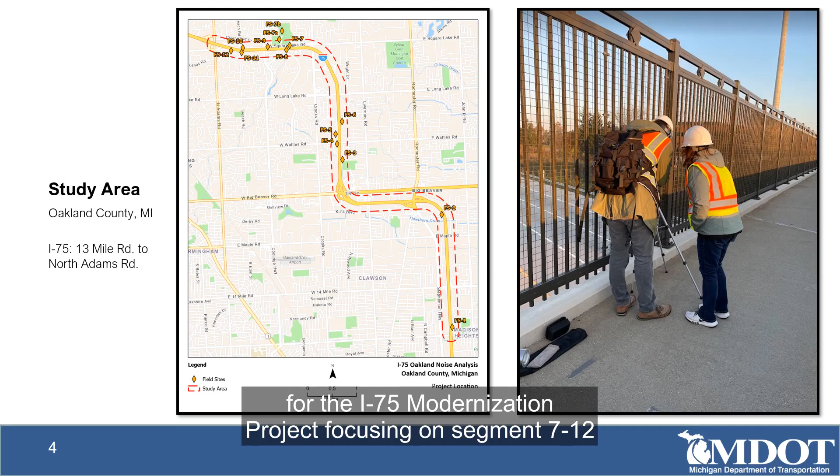This evaluation has been completed in response to a citizen-led request to investigate noise levels and the potential for additional noise barriers that might benefit noise-impacted residents and property owners in the I-75 study area. It follows several previous studies for the I-75 modernization project focusing on segments 7 through 12 from the original 14 study area segments, which is roughly a 10-mile section from approximately 13-mile road to North Adams Road, as shown on the figure, which also shows the noise measurement sites that were gathered on November 2nd and 3rd of last year.

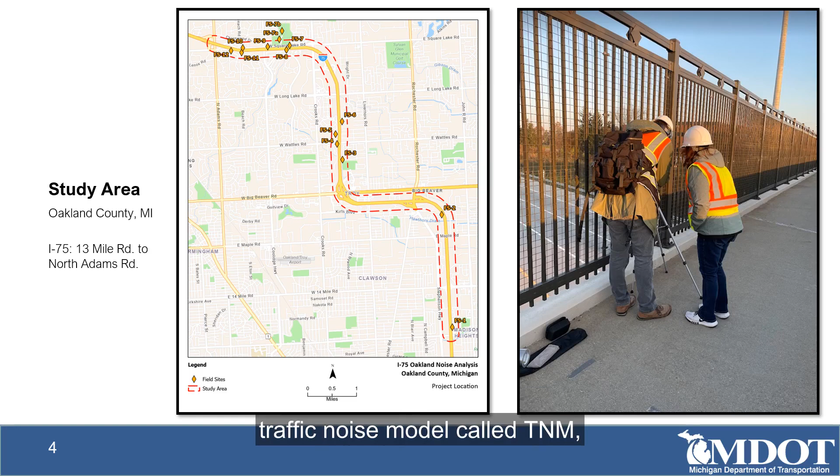The measurements are not used to determine whether there are impacts or whether noise abatement is needed, but rather to validate use of the federally required traffic noise model called TNM through comparison of measured and modeled noise levels.

Noise measurements were taken at 14 site locations, and these measurements were conducted with a Type 1 sound level meter for a period of 15 minutes each, with traffic recorded concurrently with video.

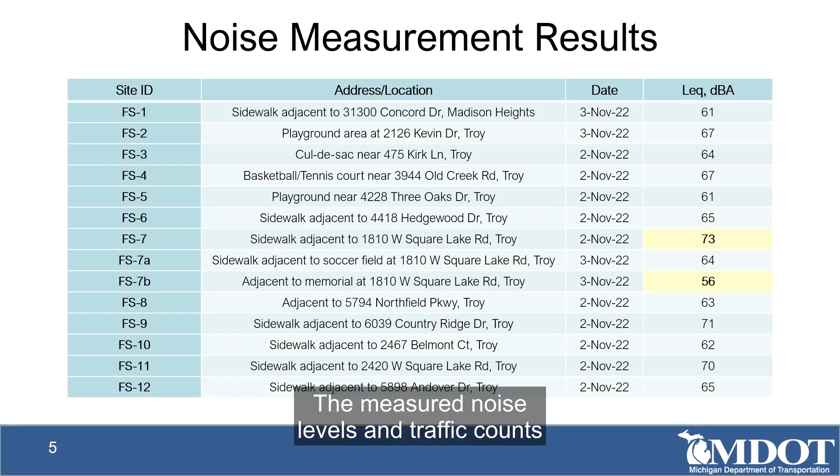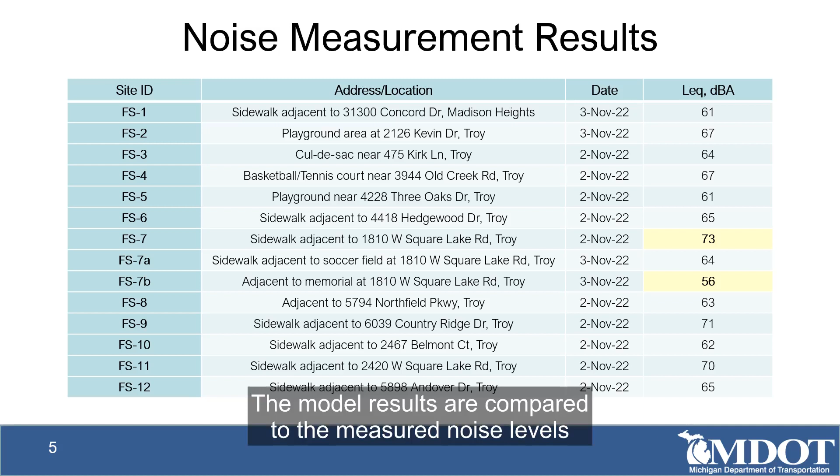The measured noise levels and traffic counts were input into TNM to validate the noise model. The model results are compared to the measured noise levels to determine if they are within plus or minus 3 decibels of each other, which satisfies the MDOT requirement for validating the noise model with measurements.

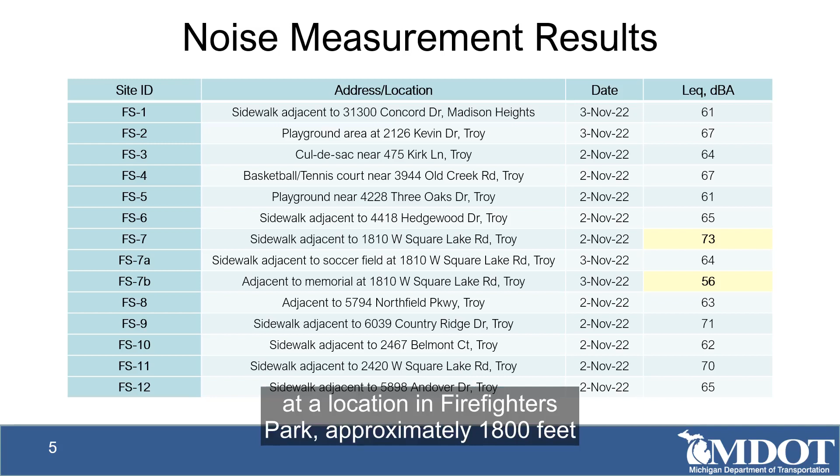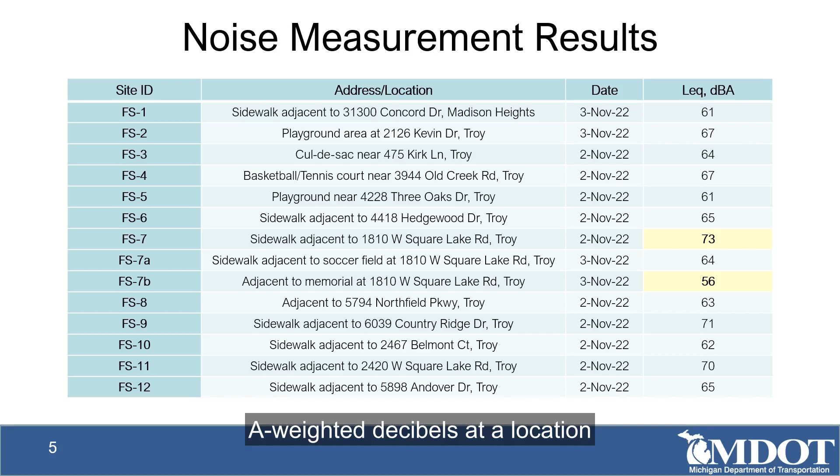To summarize the results, noise levels ranged from 56 A-weighted decibels at a location in Firefighters Park, approximately 1,800 feet from I-75, to 73 A-weighted decibels at a location north of Square Lake Road, approximately 200 feet from I-75.

Next, we will cover the noise model process.

FHWA's procedures for abatement of highway traffic noise and construction noise as presented in the Code of Federal Regulations, Title 23, Part 772, as well as the MDOT Highway Noise Analysis and Abatement Handbook, govern the noise analysis procedures.

Existing sound levels in the project area are modeled using the latest FHWA approved traffic noise model, which is TNM 2.5. Future sound levels are then also determined through use of TNM, using a future projected loudest hour traffic year in the model. The model contains specific inputs such as roadway configuration and elevations, shielding elements such as bridges or buildings, topography, and ground type in order to create a representation of the study area environment.

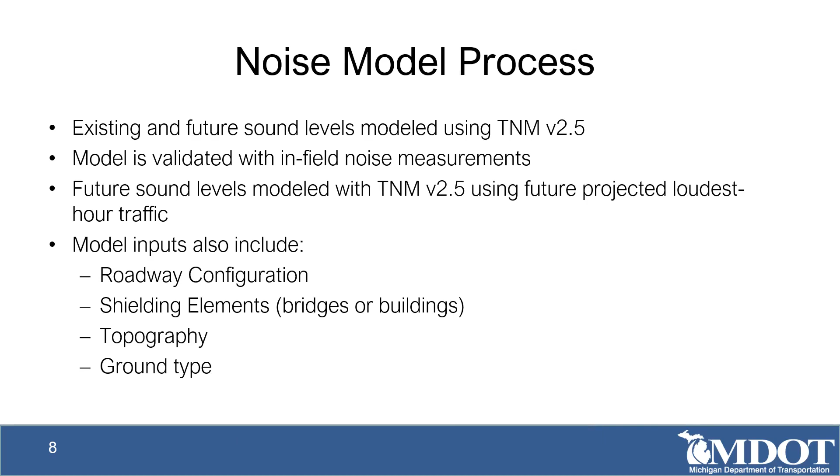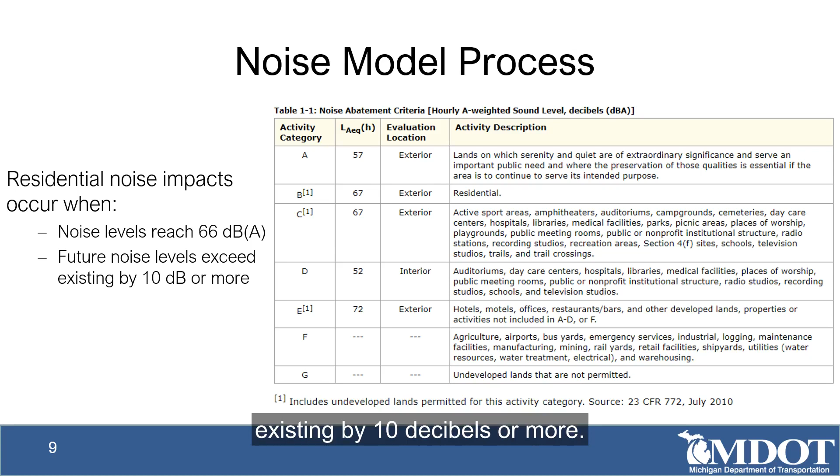Noise impact occurs for residential and outdoor recreational land use when predicted sound levels approach, which means within 1 decibel, or exceed the noise abatement criteria of 67 A-weighted decibels, or if future sound levels exceed existing by 10 decibels or more. The noise abatement criteria for other noise-sensitive land uses are also given in this table from the federal regulation.

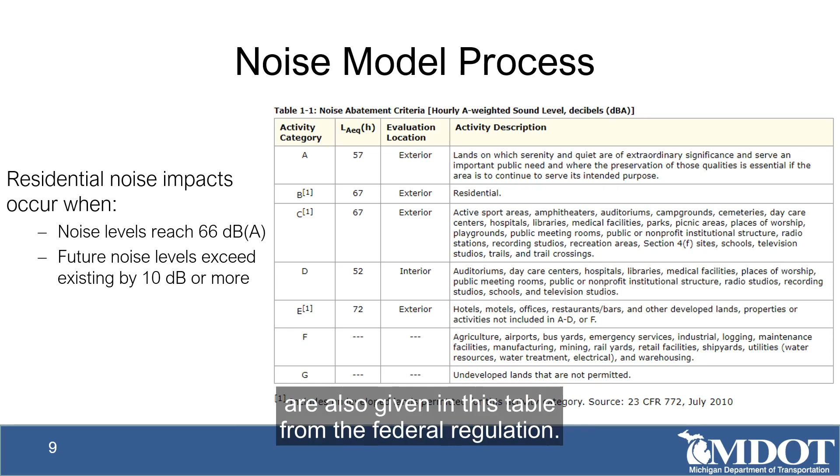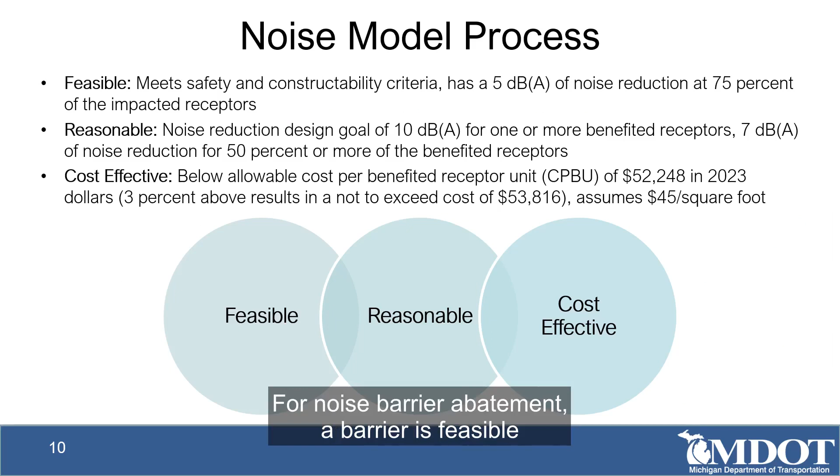After impacts are identified, we analyze noise abatement. For noise barrier abatement, a barrier is feasible if it has no construction impediments, meets safety requirements for the traveling public, and acoustically can provide at least 5 A-weighted decibels of noise reduction at 75% of the impacted receptors.

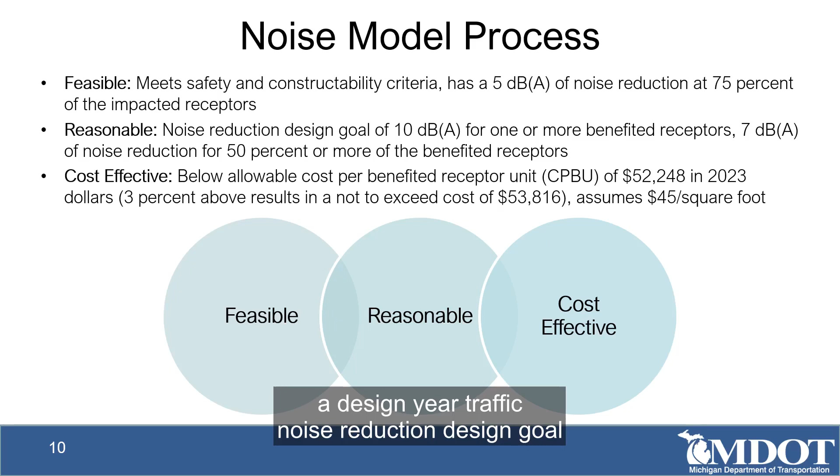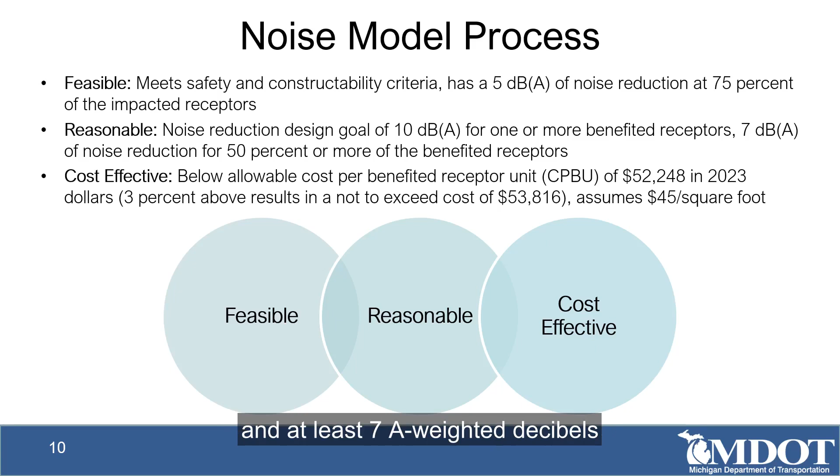A barrier is reasonable if it provides a design year traffic noise reduction design goal of at least 10 A-weighted decibels for one or more benefited receptors and at least 7 A-weighted decibels for 50% or more of the benefited receptors. Benefited receptors are those that get 5 decibels or more of noise reduction.

As part of reasonableness, a barrier must be cost effective. To be cost effective, a noise barrier's estimated preliminary construction cost must be no more than 3% above the allowable cost per benefited receptor unit of $52,248 in 2023 dollars. And this is assuming a planning cost of $45 per square foot of noise barrier.

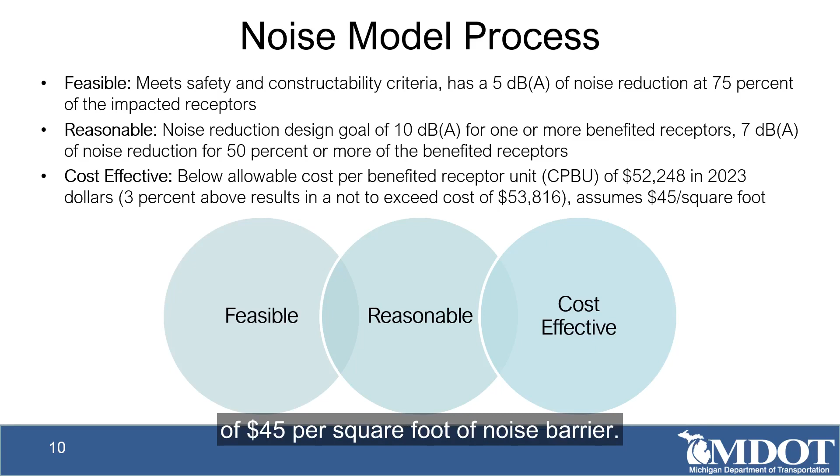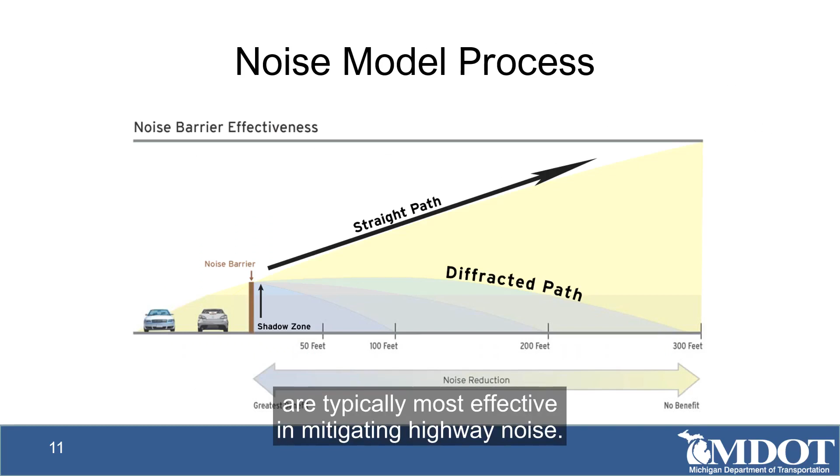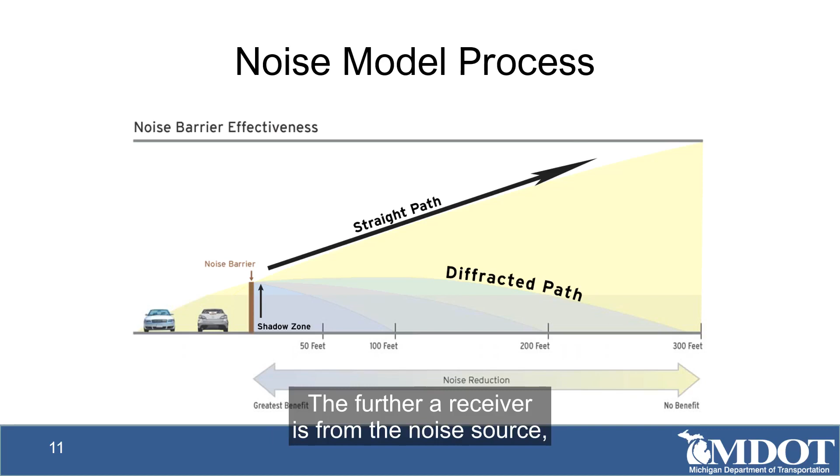This graphic illustrates where noise barriers are typically most effective in mitigating highway noise. Sound intensity is inversely related to distance. The further a receiver is from the noise source, the less intense it sounds. Noise barriers do not eliminate roadway noise. Rather, they block the direct path of the sound and reduce the intensity.

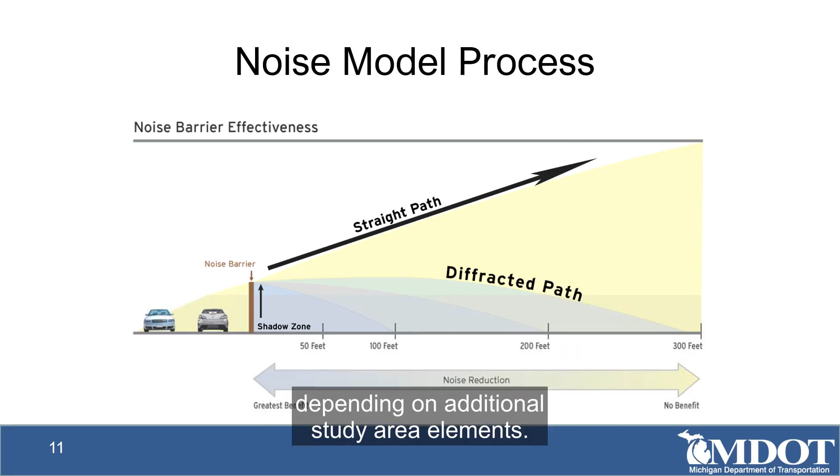Effectiveness depends on the distance between the impacted receptor and the barrier. Benefit decreases as a listener moves farther away from the barrier and is negligible at distances greater than 300 to 500 feet, depending on additional study area elements. This is due to diffraction of noise over the top of the barrier, in conjunction with the fact that noise levels are already lower with increased distance, so noise barriers are most effective in the shadow zone identified in this graphic.

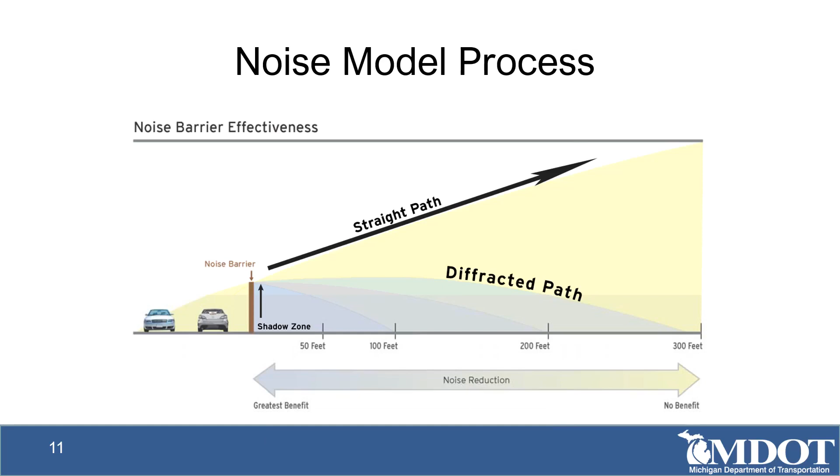Next, we'll discuss the noise modeling results for this study.

The noise study area includes an 800-foot boundary around the study limits in order to capture additional receptors outside of the zone of impact that were not included in previous studies. Several additional receptors outside of 800 feet are also included in the study to provide TNM predicted noise levels for informational purposes. Please note, the findings in this study are not intended for comparison to results from the previous studies, as corridor conditions and MDOT noise abatement criteria have changed since then.

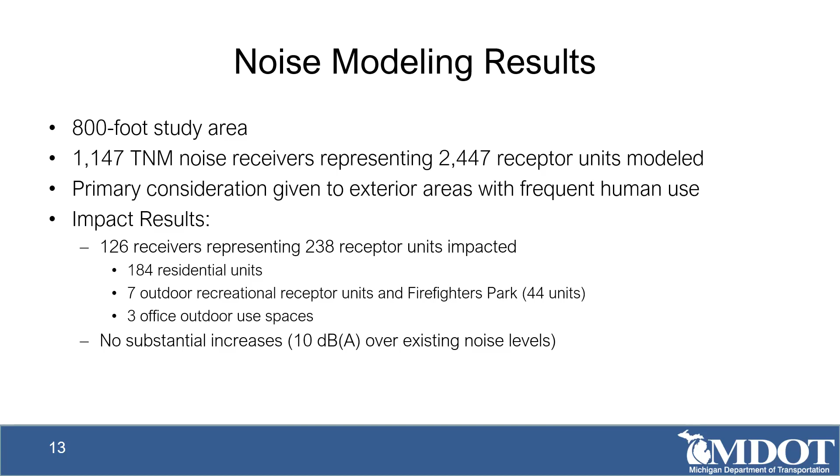14 noise barriers have been evaluated in this study. Two are existing noise barriers without predicted noise impact behind the barrier. Therefore, no further evaluation is completed for those. Six are existing noise barriers with noise impact predicted behind the barrier.

So per FHWA guidance, these were further evaluated against MDOT's feasibility and reasonableness criteria to determine if they are meeting the criteria as built. Six potential noise barriers were evaluated in new locations to determine if MDOT's current feasibility and reasonableness criteria could be met based on the current highway configuration and latest roadway speed data.

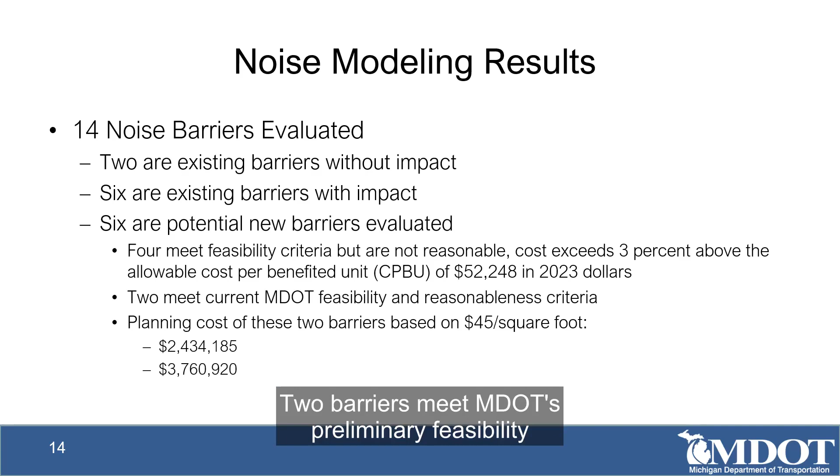Of these six, four barriers meet preliminary feasibility criteria, but do not meet the reasonableness criteria. Two barriers meet MDOT's preliminary feasibility and reasonableness criteria.

Let's go through these results in more detail.

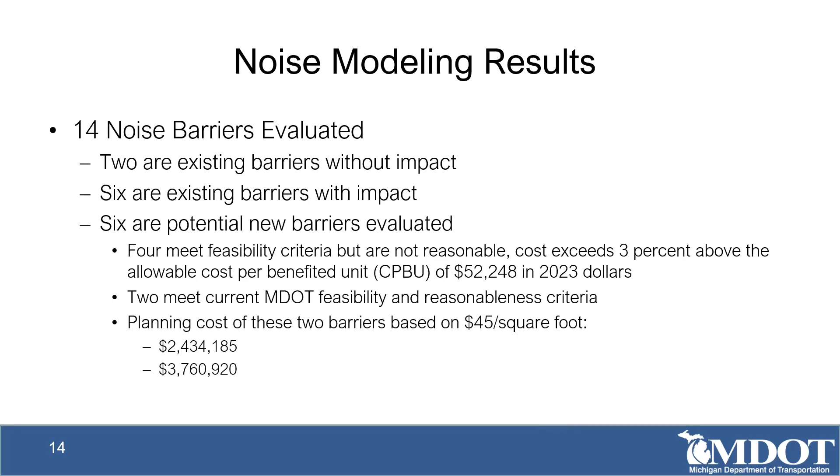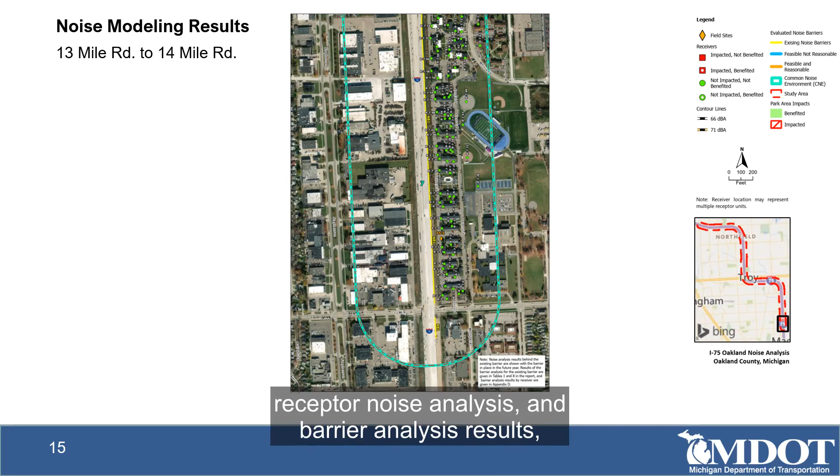These figures will show the 800-foot study area, the common noise environments, the measurement sites, receptor noise analysis and barrier analysis results, and the evaluated noise barriers.

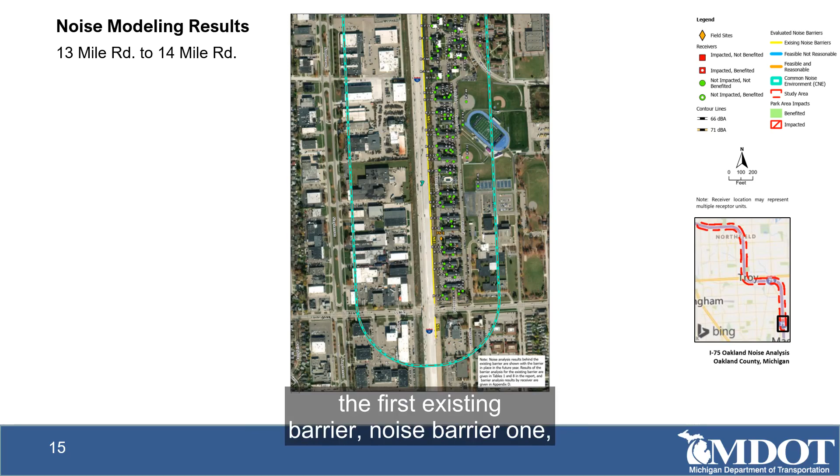Starting at the south end of the study area, the first existing barrier, noise barrier 1, has little impact behind it. Note that these figures will show the receptor results with the existing barrier in place.

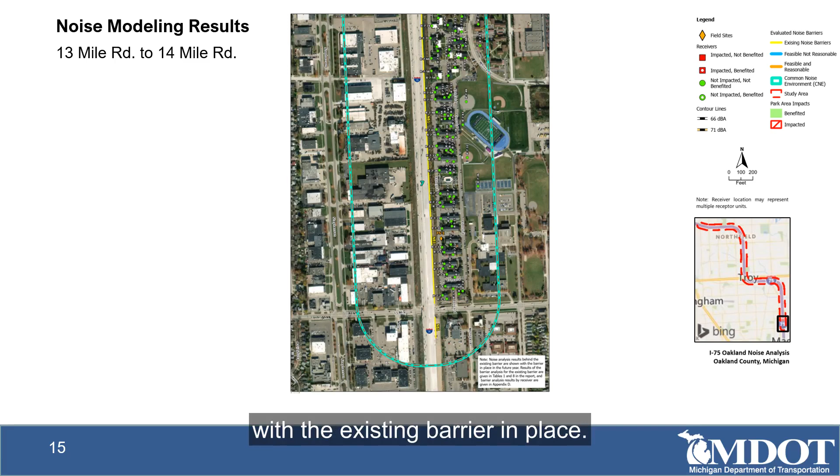Due to the one impact shown here on the north end, this barrier was evaluated to determine if it is feasible and reasonable as built based on current MDOT criteria. This is accomplished by comparing the no barrier scenario to the built barrier scenario in the future year noise model. This barrier is feasible and reasonable as built.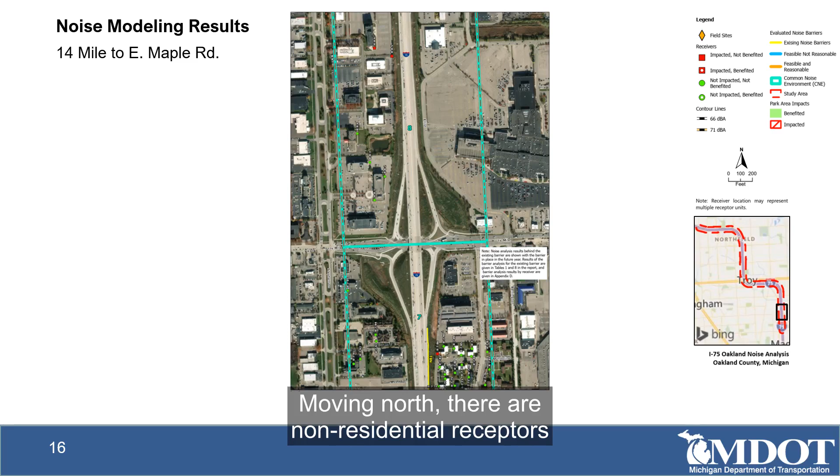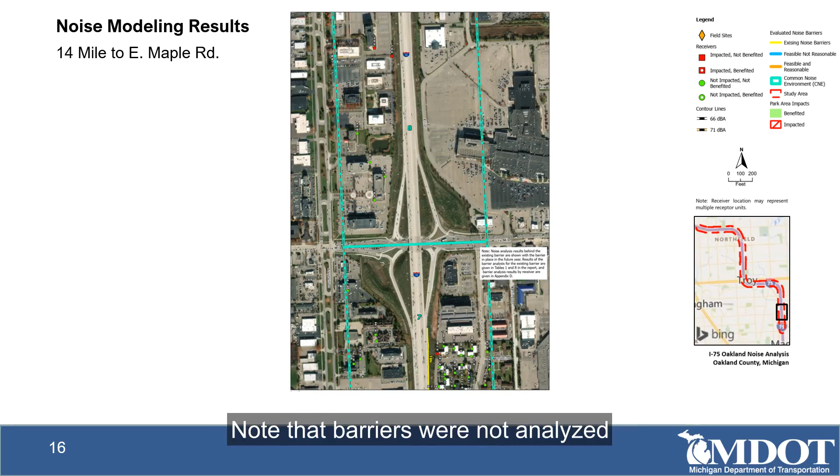Moving north, there are non-residential receptors west of I-75 that were evaluated due to outdoor use spaces such as hotels, offices, or restaurants. Note that barriers were not analyzed for the few impacts found at these types of sites because they are isolated locations.

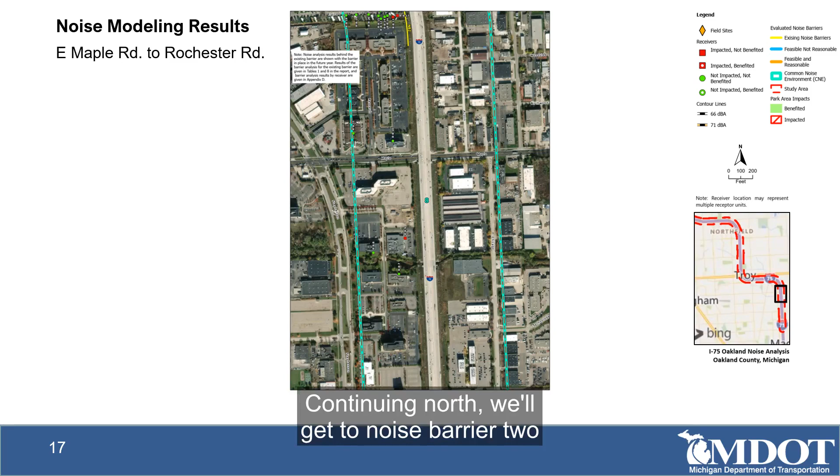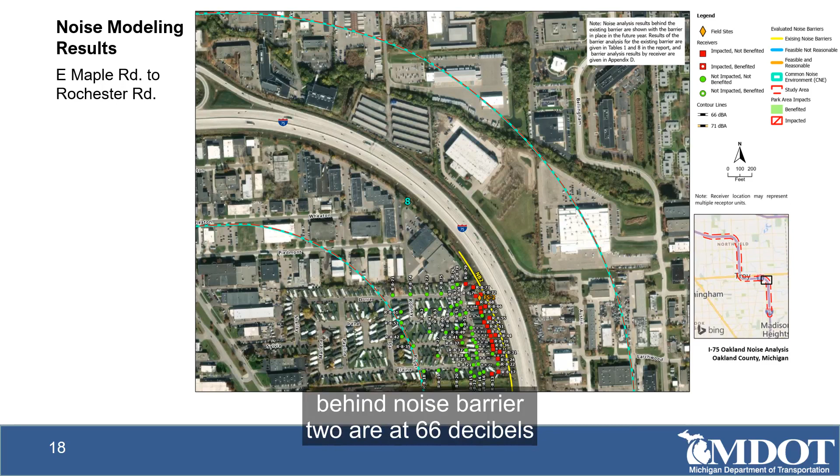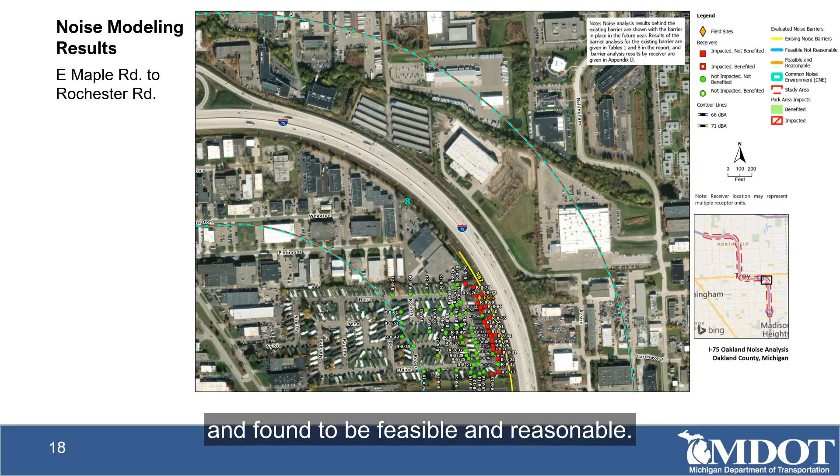Continuing north, we'll get to noise barrier 2 on the next slide. Some residential and recreational areas behind noise barrier 2 are at 66 decibels or above, resulting in impact. This barrier was also evaluated against current MDOT criteria and found to be feasible and reasonable.

The same situation exists for noise barrier 3 and noise barrier 4. Noise barrier 4 was found to be feasible and reasonable as built. However, noise barrier 3 was not quite meeting the noise reduction requirements of 10 decibels at one receptor or 7 decibels at 50% of benefited receptors.

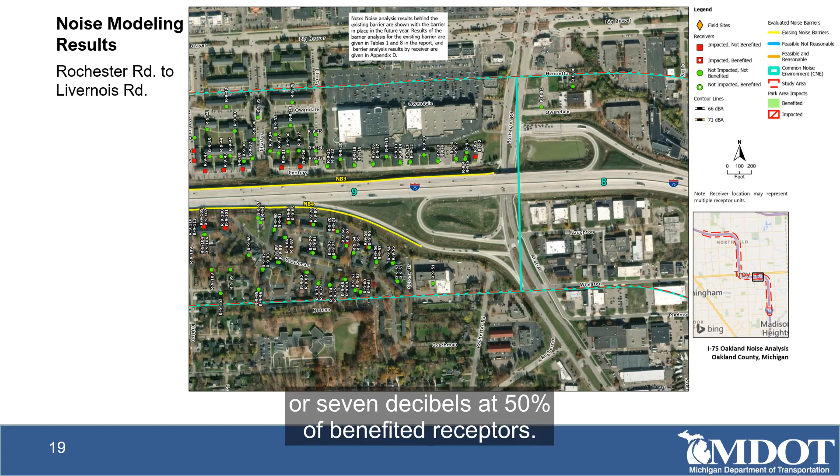Although it is still very cost effective, because the analysis for this existing barrier with the current highway configuration and latest roadway speed data is shown for informational purposes and there is no project being analyzed, no further analysis or recommendations are intended for this barrier.

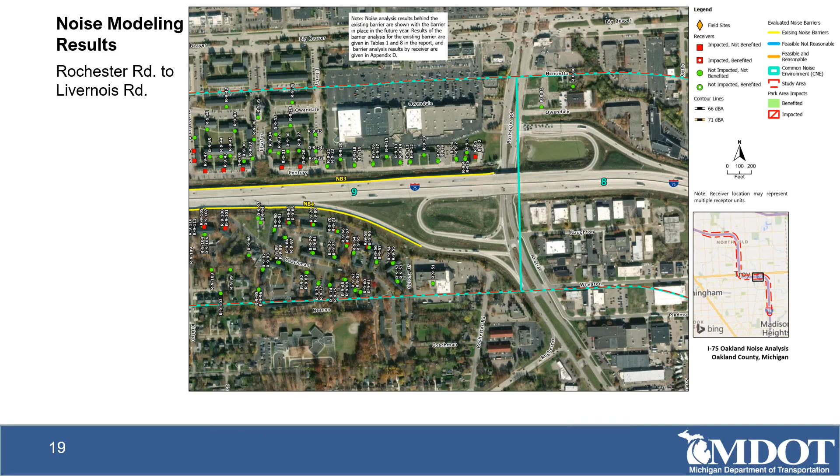Here are the west ends of noise barrier 3 and noise barrier 4.

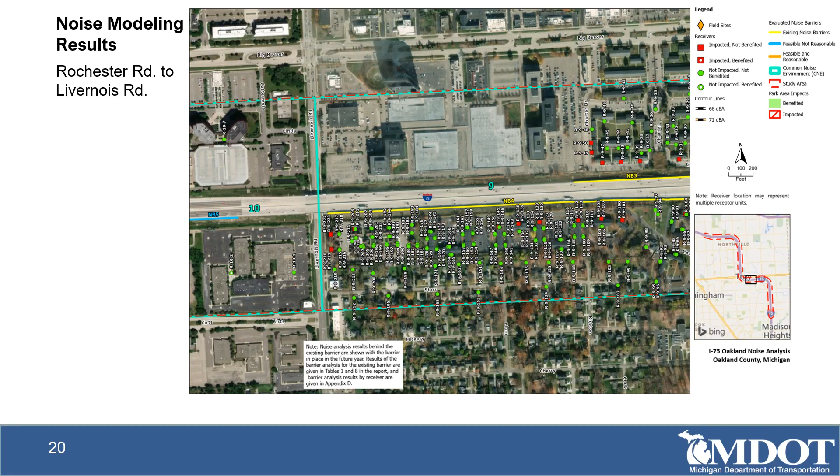Next, noise barrier 10 was evaluated as a new barrier for impacted residents south of Big Beaver Road. However, due to the low number of receptors, this barrier is not reasonable.

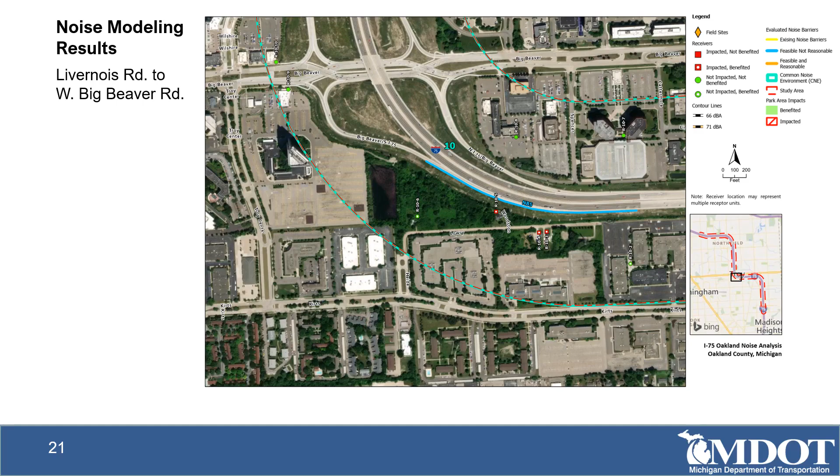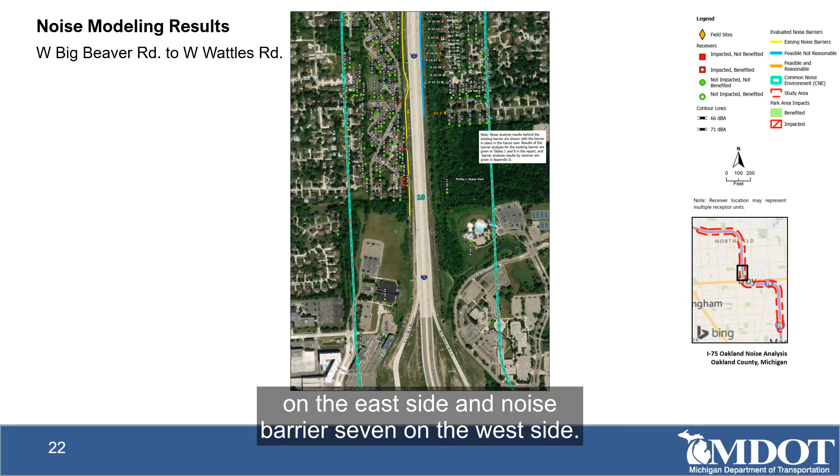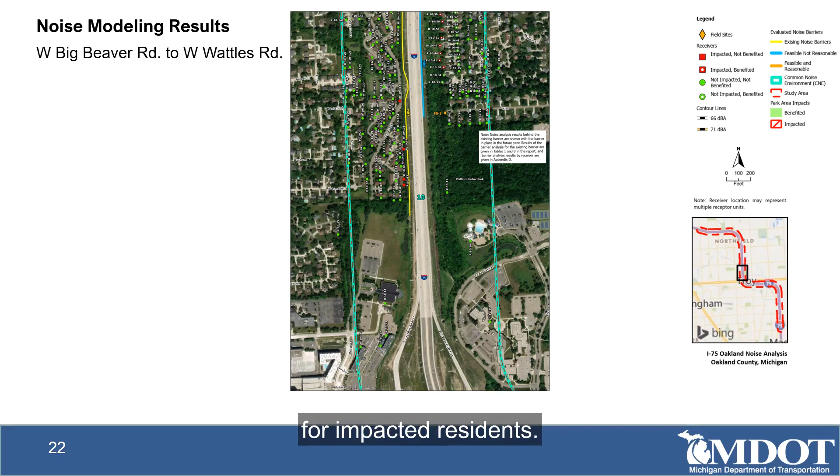Moving north of Big Beaver Road, we have noise barrier 6 on the east side and noise barrier 7 on the west side. Noise barrier 6 is a new evaluated barrier for impacted residents. Note that these receptor results will show both the noise level results without a barrier as well as the benefit information with the analyzed barrier.

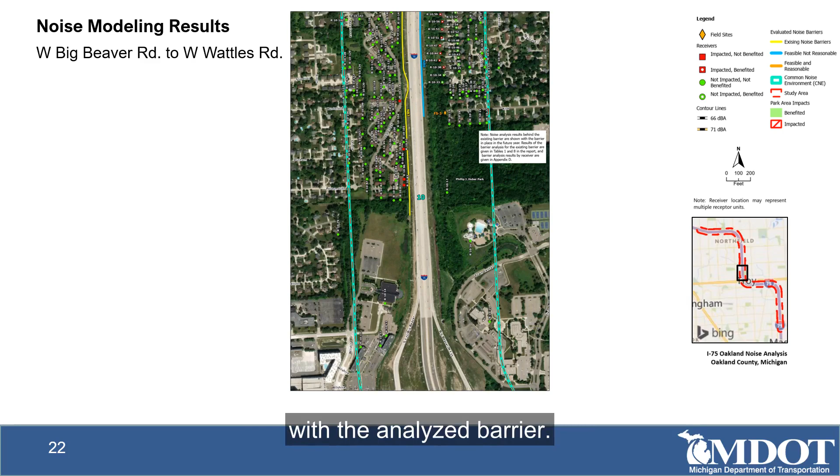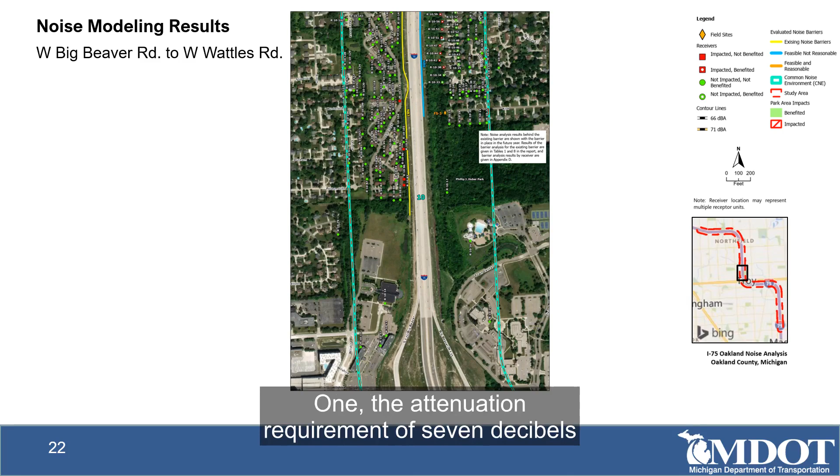Noise barrier 6 is not reasonable due to two factors. One, the attenuation requirement of 7 decibels for 50% or more of benefited receptors is not achieved. And two, it is not cost effective.

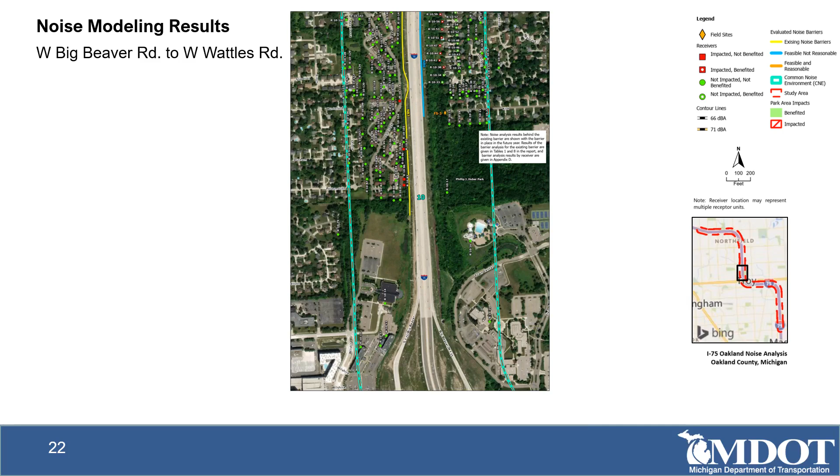One of the challenges at this location are the existing berms in the area, which make it difficult to get the necessary noise reduction at receptors for reasonableness.

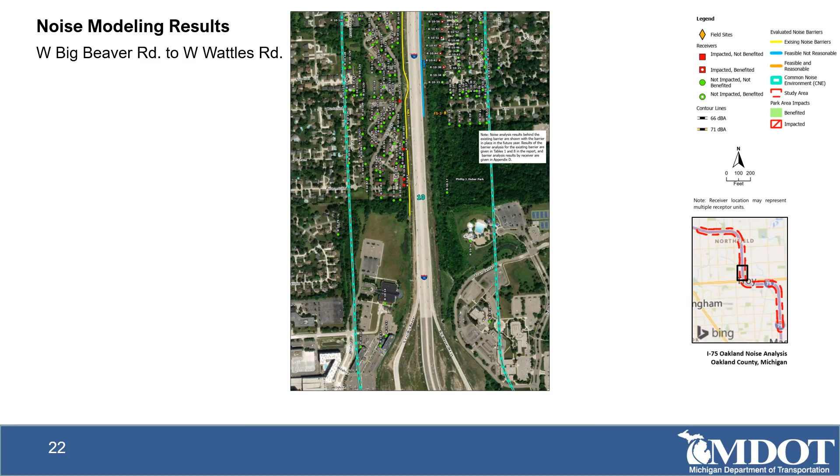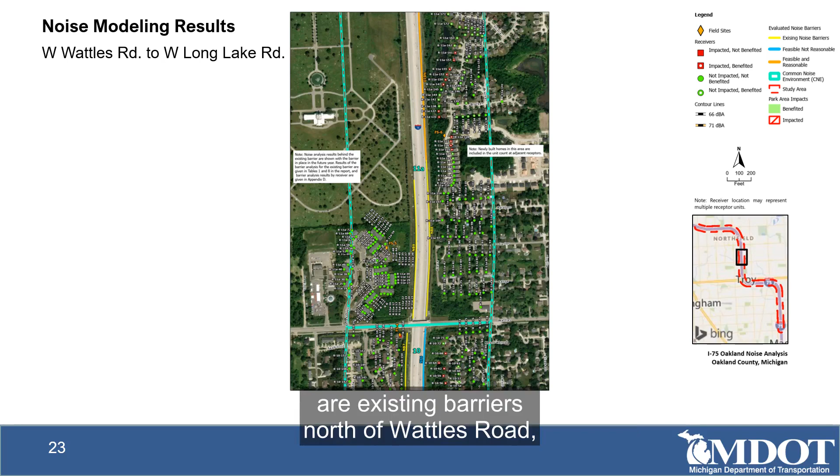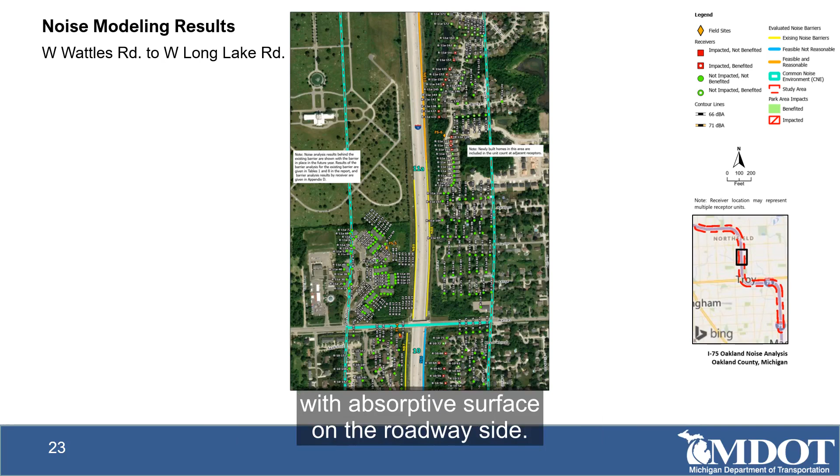Noise barrier 8 and noise barrier 9 are existing barriers north of Wattles Road, where no impact is predicted, so no additional analysis was completed.

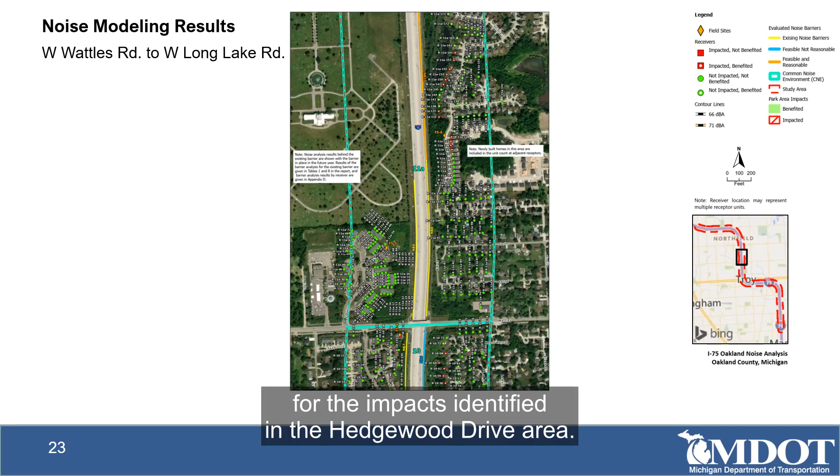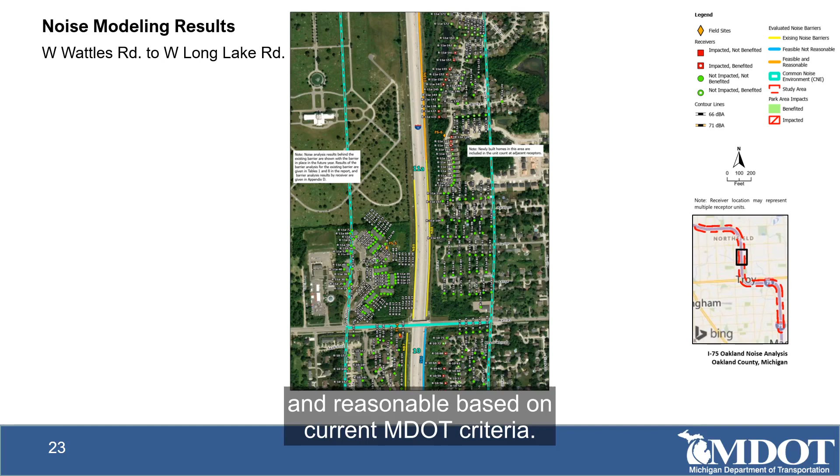Note that these barriers were built with absorptive surface on the roadway side. Noise barrier 10 is a new barrier analyzed north of noise barrier 8 for the impacts identified in the Hedgewood Drive area. Noise barrier 10 was found to be feasible and reasonable based on current MDOT criteria. The estimated planning cost of this barrier is $2,434,185.

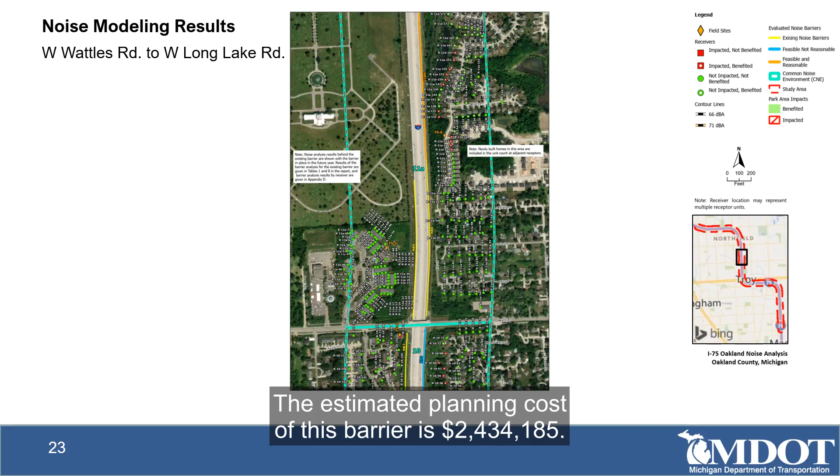Moving north around Long Lake Road, no impact is predicted as receptors get farther from the roadway. This figure also shows lines indicating the distance to the 71 and 66 decibel noise level in the open spaces between the roadway and receivers. South of Long Lake, a berm near the neighborhood reduces the distance to 66 decibels, while north of Long Lake, an existing building is providing shielding as well.

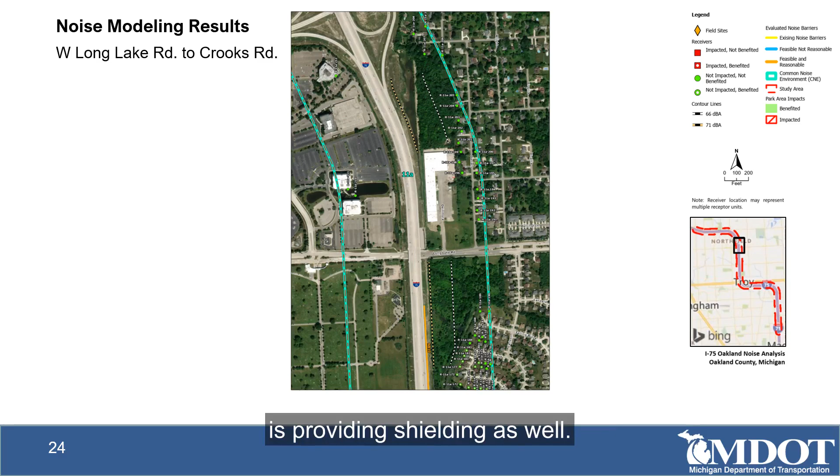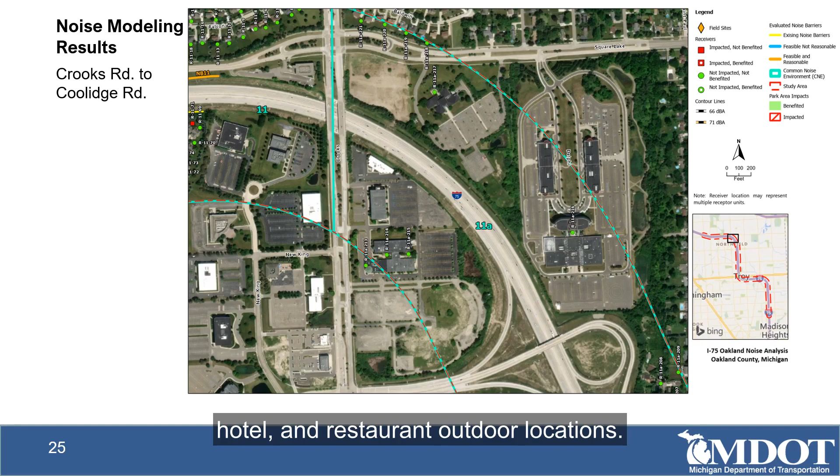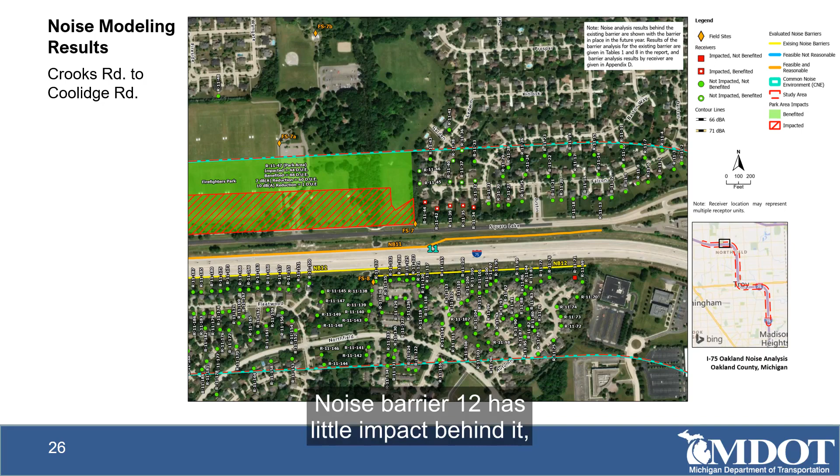Continuing north, we have some non-impacted office, hotel, and restaurant outdoor locations. Continuing past Crooks Road, we have noise barrier 11 on the north side and noise barrier 12 on the south side. Noise barrier 12 has little impact behind it and was found to be feasible and reasonable as built.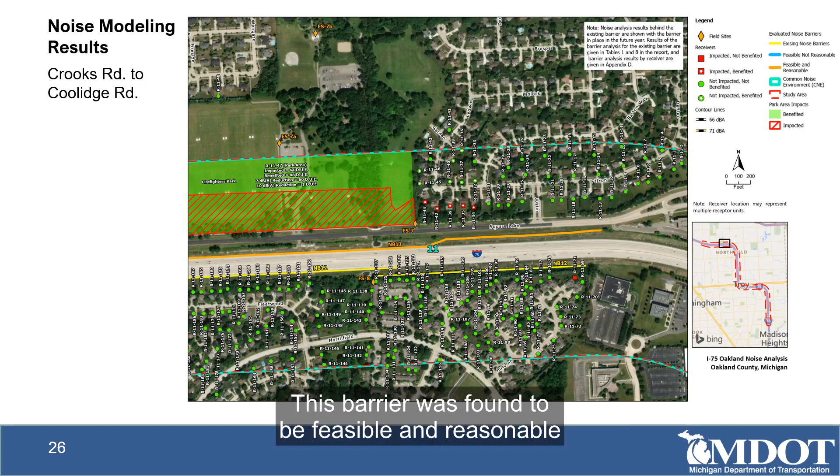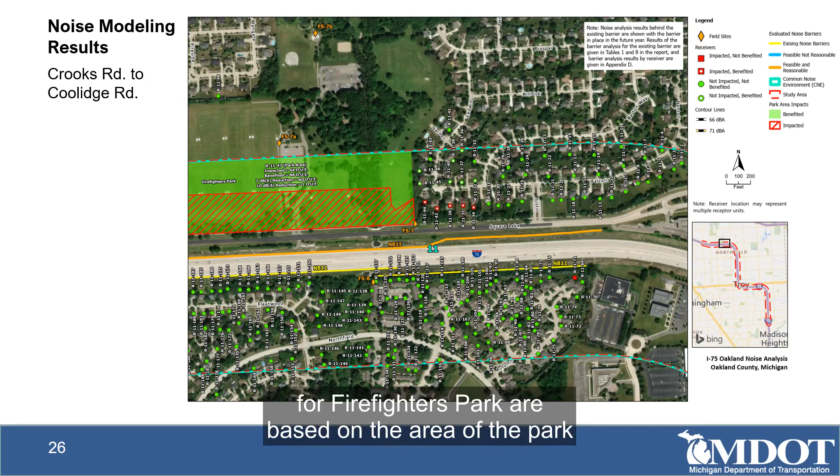Noise barrier 11 is a new barrier analyzed for the residences north of I-75 and Firefighters Park. This barrier was found to be feasible and reasonable based on current MDOT criteria. Note that the dwelling unit equivalents calculated for Firefighters Park are based on the area of the park experiencing impact and receiving varying levels of noise reduction from the analyzed barriers.

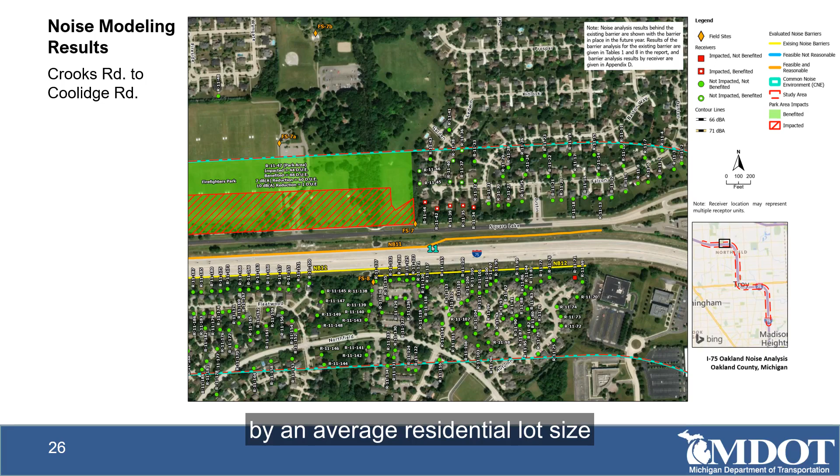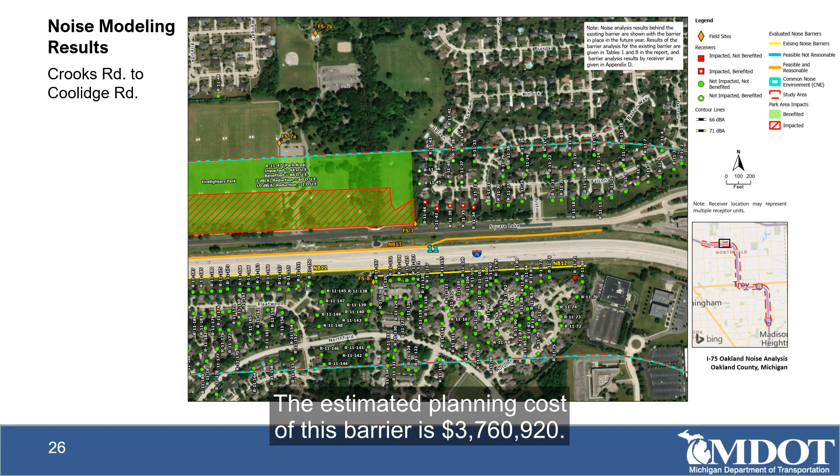These areas were determined using a dense grid of receptors in TNM to gather results, and these areas are divided by an average residential lot size in the nearby neighborhoods to determine units. The estimated planning cost of this barrier is $3,760,920.

Continuing west of Coolidge Highway, noise barrier 13 and noise barrier 14 are new barriers analyzed on either side of I-75 for the predicted impacts.

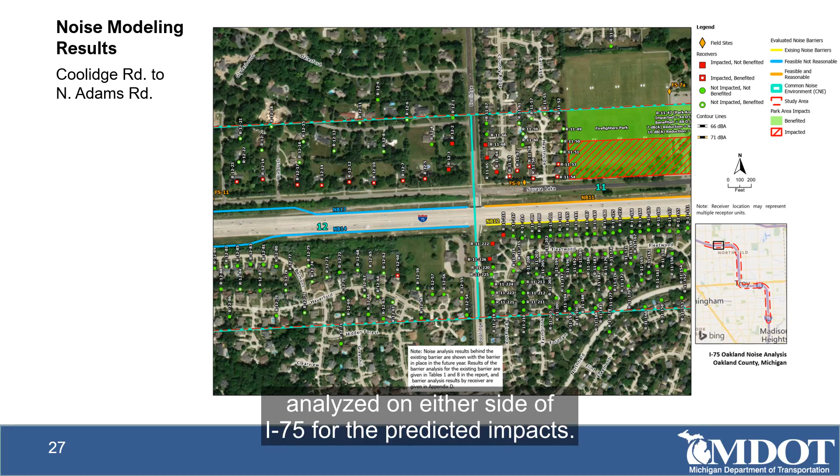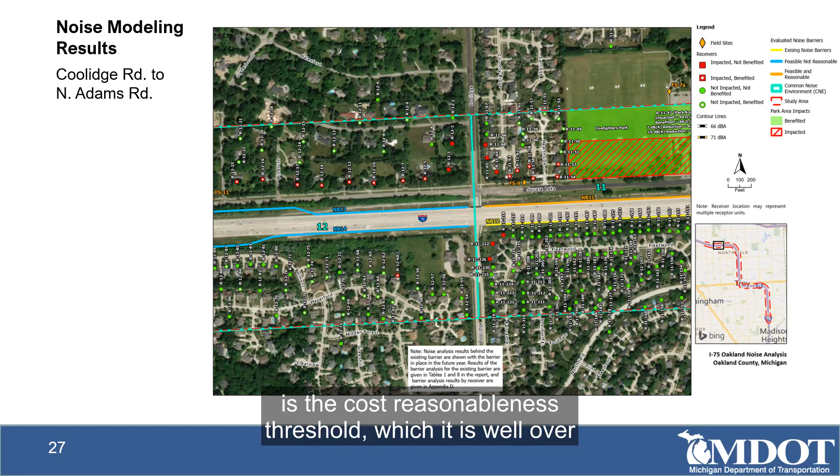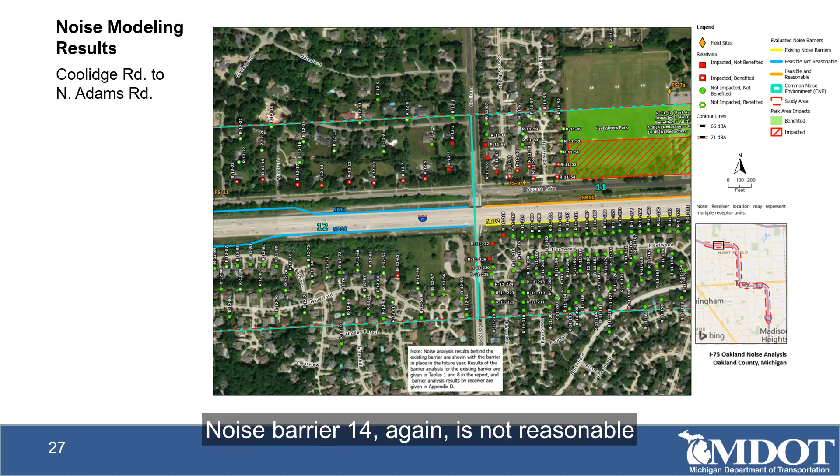For noise barrier 13, the only criteria not met is the cost reasonableness threshold, which it is well over at $155,954 per benefited receptor. Noise barrier 14, again, is not reasonable due to two factors. One, the attenuation requirement of 7 decibels for 50% or more of benefited receptors is not achieved. And two, it is not cost effective.

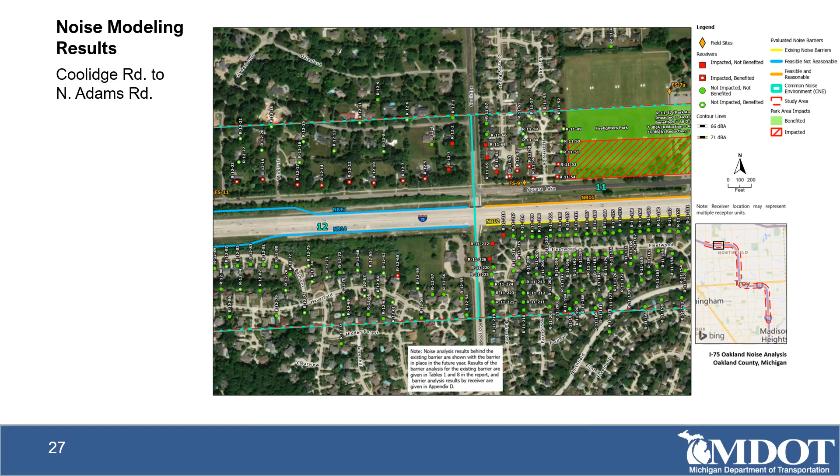The terrain on the south side of I-75 makes it challenging to gain sufficient noise reduction on this side. The cost per benefited receptor is again high at $113,277. Note that for both noise barrier 13 and noise barrier 14, the analyzed barrier includes segments of bridges at a 20-foot height.

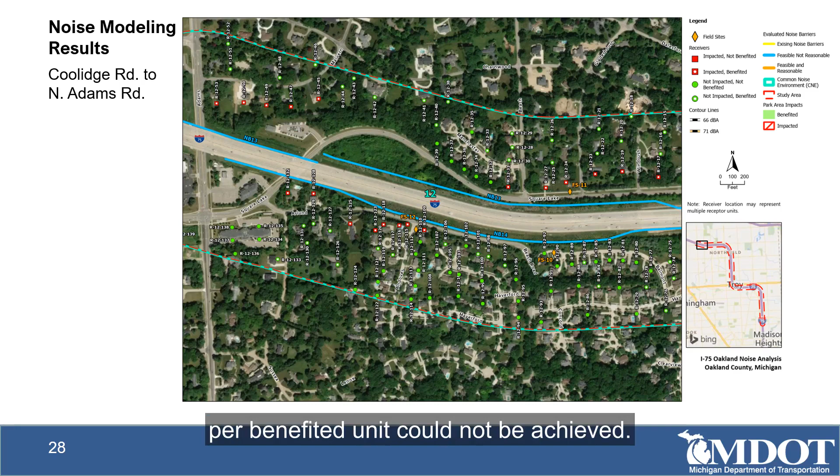These segments were included in the analysis to confirm whether or not a feasible and reasonable barrier could be achieved with additional shielding from barriers on bridges. However, a design nearer to the allowable cost per benefited unit could not be achieved. Also note, shorter lengths of these barriers were evaluated, but were also not reasonable nor cost effective.

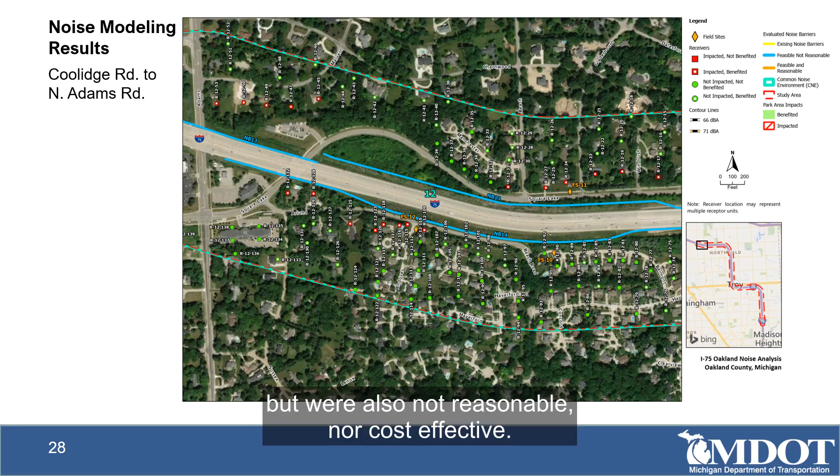And here is our last slide with the results showing the far west ends of noise barrier 13 and 14.

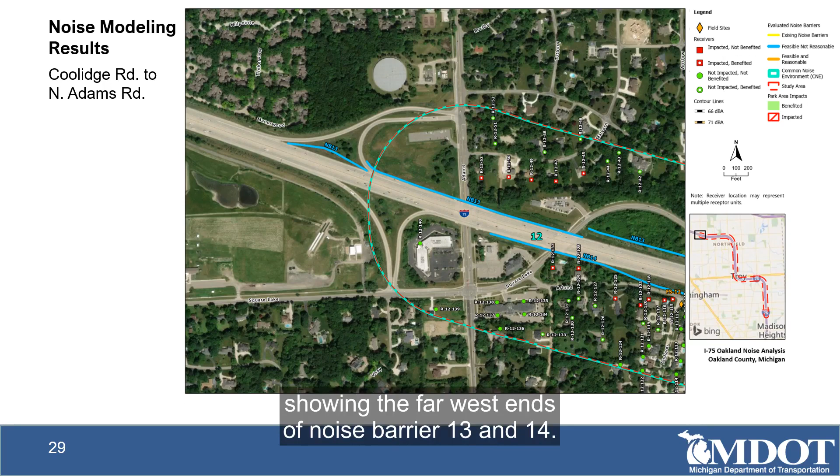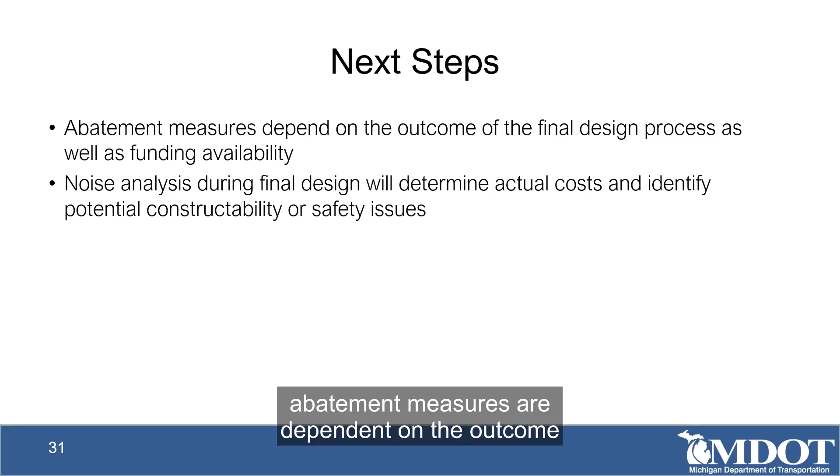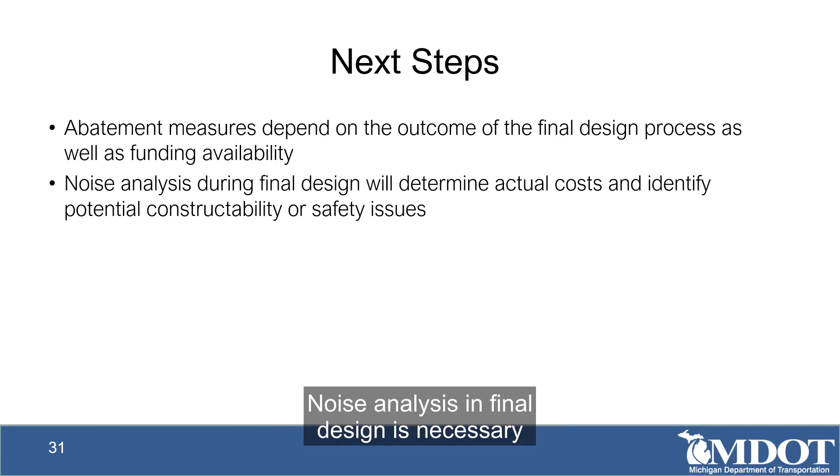As far as next steps, abatement measures are dependent on the outcome of a final design process, as well as funding availability. Noise analysis in final design is necessary to determine actual cost and identify potential constructability or safety issues.

For reference, presented here is a range of anticipated cost estimates for the feasible and reasonable barriers based on more accurate and recent cost data. Note that these ranges are general estimates, and actual cost will depend on site-specific variables and the materials being used for construction.